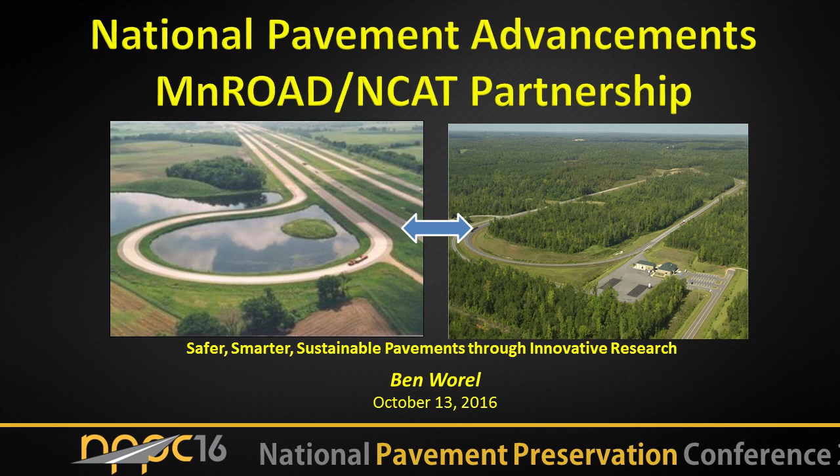Thank you very much for that nice introduction. And I appreciate being able to be here to speak to you about our partnership and the excitement we have related to it with our sponsors. Again, this partnership is something that Buzz and I have been thinking about for a long time. We always used to say, wouldn't it be nice? And thank all the sponsors and all the people involved to make this partnership possible. So we really appreciate here at the Minnesota DOT this partnership.

I'll talk a little bit about some of the parts about MnROAD, and I'll talk about the partnership. And it's important to know about MnROAD that we have a dedicated staff to be doing this work. MnROAD is owned and operated by the Minnesota DOT. We've been going now for 22 years doing different research. We've gone through a number of different phases of our research, and we've had a lot of success.

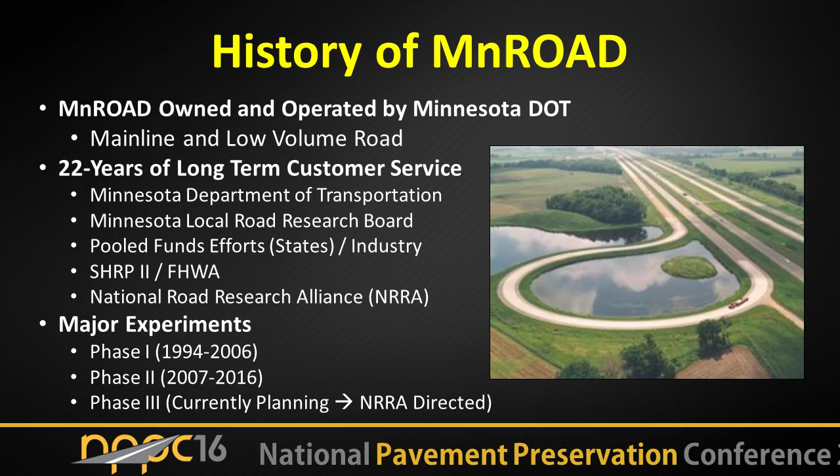We've worked with our Local Road Research Board, which is cities and counties of Minnesota that have helped sponsor our test track along with the Minnesota DOT. We worked with the industry, worked with Federal Highway, SHRP 2. And now we're working with the National Road Research Alliance, which actually brings in partnerships and things like that we're looking for to work with industry. We're rebuilding our test track with the National Road Research Alliance input, and really looking forward to our third phase of research.

Something to say about our operations. Again, we're very lucky in the state of Minnesota with our top staff. It really appreciates having researchers that can do research, not just manage research. So we have a lot of staff that are able to do this, and that gives us the consistency that you need to have a successful organization when it comes to research. So, when one person leaves, we have more people to fill in behind them. And MnROAD's really good because it allows for that type of facility where everyone can work, and you have people to back each other up.

But we do a lot of the research development. We do the construction, the performance monitoring. We have lots of sensors in our roadway, similar to what NCAT has. We have a database where we keep all the information, and actually most of that information now is online, where you can just click and get the information right from the website. But again, we provide traffic loadings, and one thing that we've developed just in the last year is the Pathways van right there. That's something that we've added.

We're trying to do our monitoring in more of an economic fashion. With this type of system, we have 3 Pathways vans in the state of Minnesota, 2 for production and 1 for research. And that research van is going to be one of the vans that will be collecting the data on our US 169 and our CSAH 8. But it gives us the opportunity to kind of branch outside of MnROAD and do different things like this pavement preservation, where I need a longer stretch of roadway to do it.

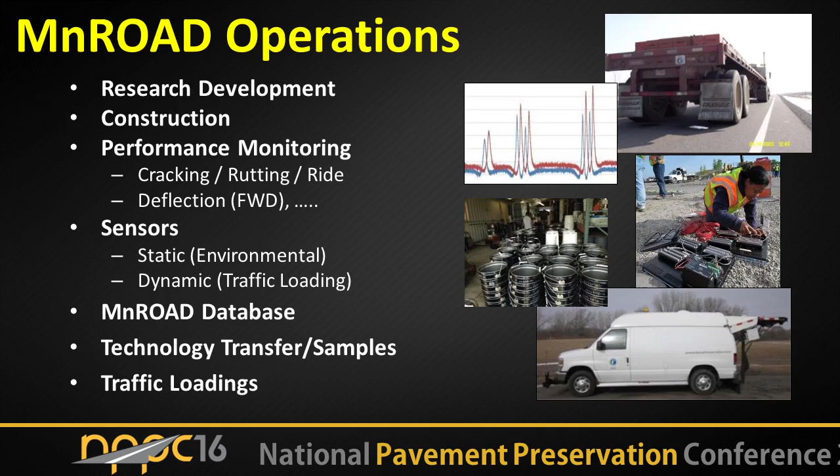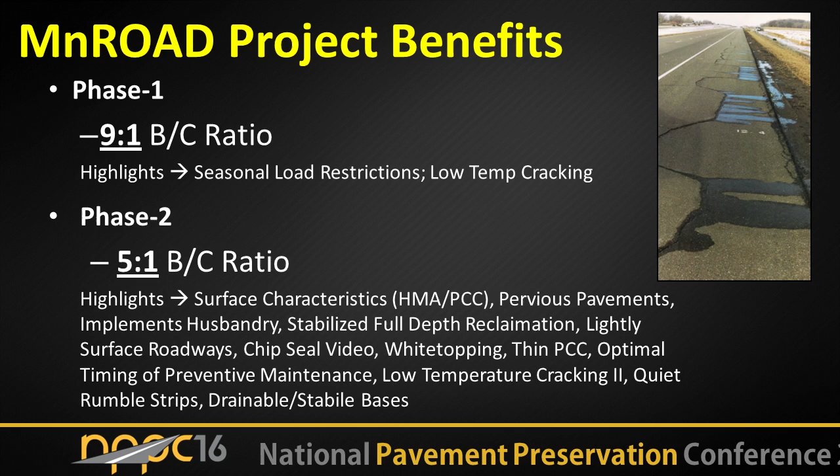I just wanted to show this, we've really done well in our research in Minnesota, and this is just showing the benefit cost ratios for Minnesota DOT and the Local Road Research Board. We're seeing in our first phase, 10 years, we were 9-to-1, and the last 10 years, we were about 5-to-1. I think we got a little more picky in how we established that. But we have shown a benefit for the state, and that's why the state continues to help sponsor our efforts there. But again, we're looking to be more of a national facility through the National Road Research Alliance in the future. A couple of things, we have done a lot of pavement preservation efforts at MnROAD.

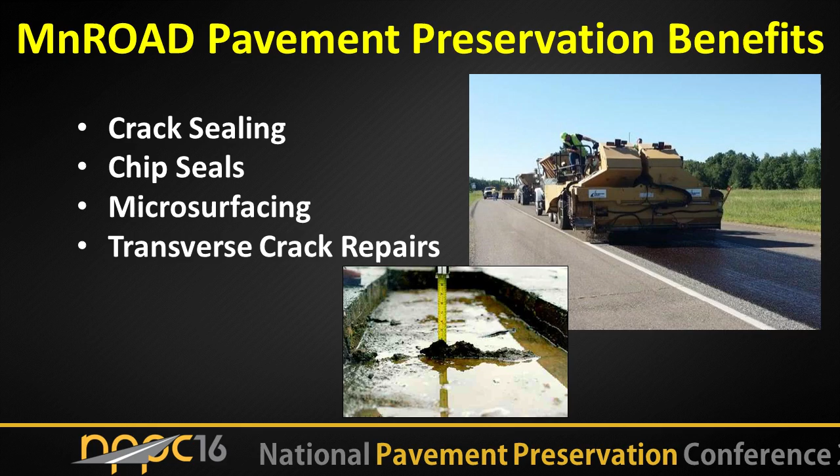I wanted to point these out real quickly. We've done a number of crack sealing, a number of reports related to that, the chip seals. Our first phase of research, we did microsurfacing on all the sections where we did combinations of 1-pass, 2-pass, filling in the transverse cracks, not filling them in. We have lots of good information on, even before the partnership developed, how to deal with our transverse cracks.

You can see what happens in Minnesota is the base is quite wet. We have non-drainable bases. You get these transverse cracks, and you get that deterioration, and you get the cupping of those transverse cracks. And I'll talk a little bit about that when we get to CSAH 8.

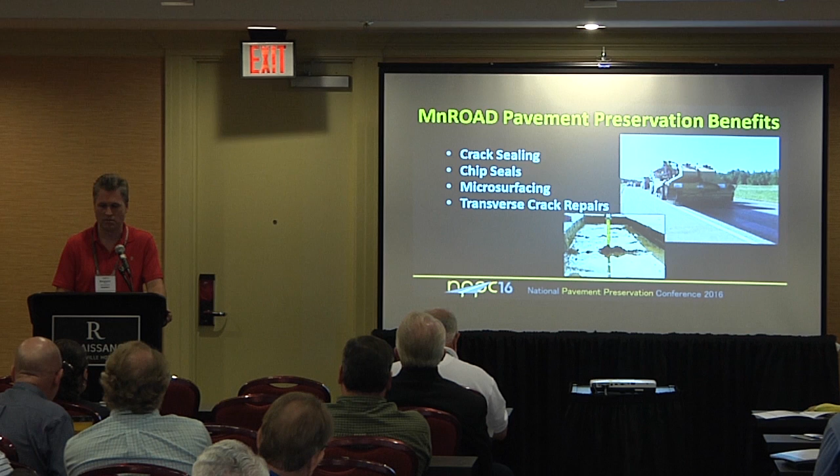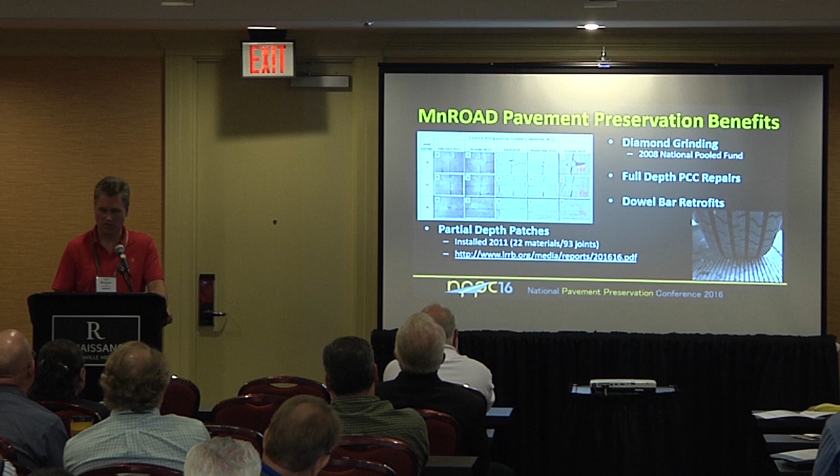We've done stuff in concrete too. This is something that we're quite proud of. We've done a number of different things with diamond grinding efforts, a number of different things with partial depth patches. We did lots of different partial depth patches on test sections in the last few years and have a pretty good report on 22 different manufacturers, different products that have been put out there. We've done stuff with dowel bar retrofits. So we're doing both asphalt and concrete at MnROAD.

And that kind of brings me to the initiatives, and the reason I'm here to talk to you is about the national research initiatives related to our partnership with NCAT. We're working right now on 2 different studies with NCAT, and one of them has to do with the National Pavement Preservation Study, but the other one's development of a national cracking test for HMA pavements. And again, this is under a pooled fund study that's NCAT. MnDOT is a subcontractor to NCAT in this phase of the research.

We have a lot of partners. One thing that's been nice about this partnership is before, we and NCAT both were kind of regional. We didn't go south, they didn't go north. But when we started looking at the research we wanted to do, it was really advantageous to have this partnership so we could bring in partners from both areas and have perspectives of the north and the south and the different climates that we have.

The National Cracking Performance Test, 2 slides on this, but this is where we've done a lot of work in the last few years through 2 pooled fund studies looking at thermal cracking, how to predict thermal cracking from the asphalt mix before you place that mix. We feel very strongly about this. NCAT is looking at top-down cracking, whereas Minnesota is looking at thermal cracking. But the idea here is that we'll be having a number of mixes and looking at whether we can predict that cracking and see what the performance is.

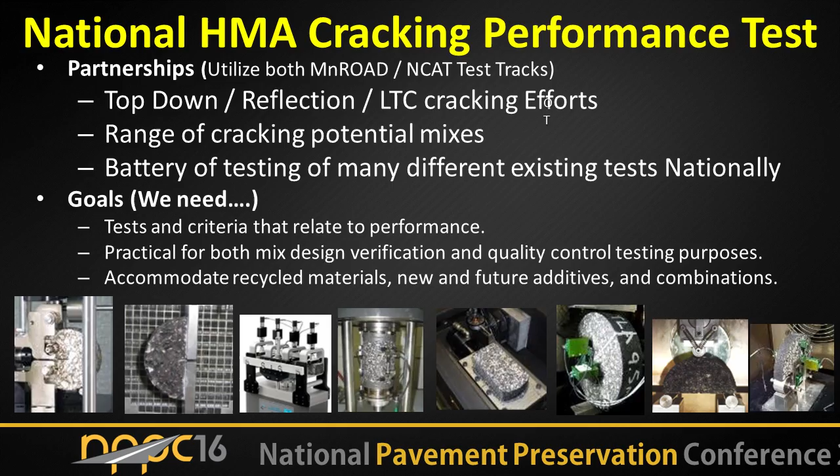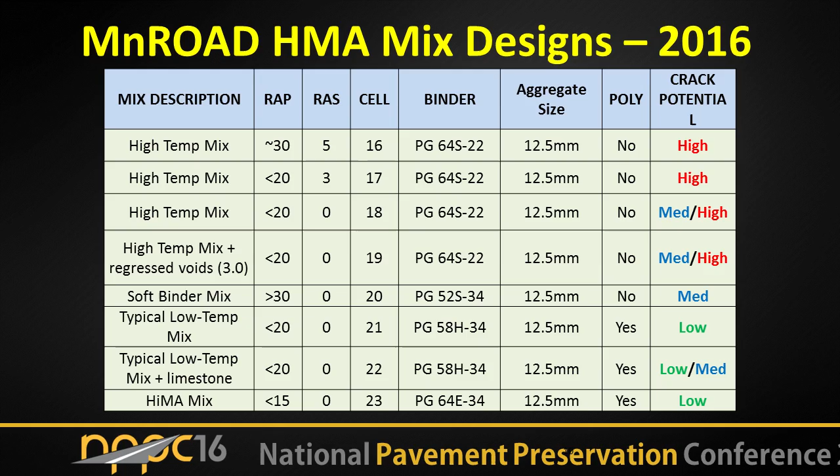But again, we built these 8 test sections. We just finished up this summer. Again, we're trying to figure out through the testing, and NCAT's doing a lot of the testing. We're doing some of the testing, and a number of other universities are doing testing on these mixes to look at that potential of cracking. And now we only have to wait for the inevitable, a nice cold winter, to see what happens.

Related to the National Pavement Preservation Study with NCAT, again, the idea here is that we needed a long stretch of roadway. MnROAD itself doesn't really lend itself to that because we have 500-foot test sections. And those test sections, just like NCAT, there's not a lot of space or a lot of real estate to use. So that's why we brought it out to these different test sections that are nearby on US 169 and CSAH 8, just like they did in Lee Road and US 280. The idea is to bring it out there so you have consistent layers that you can build upon and then look at the performance of those layers.

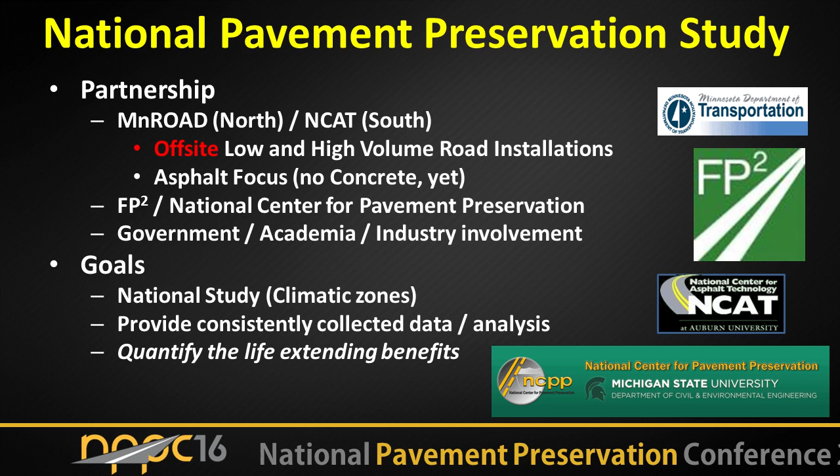But again, we've really appreciated having the partners that NCAT was working with through this, FP Squared, along with the National Center for Pavement Preservation here that's sponsoring this conference. Really appreciate their input, but that allows us to have climatic zones for both north and south. And now with this partnership, it kind of forces NCAT and MnROAD to do things that we've always wanted to do also, is do data collection in similar ways, do different things, and look at the life extending benefits of these treatments.

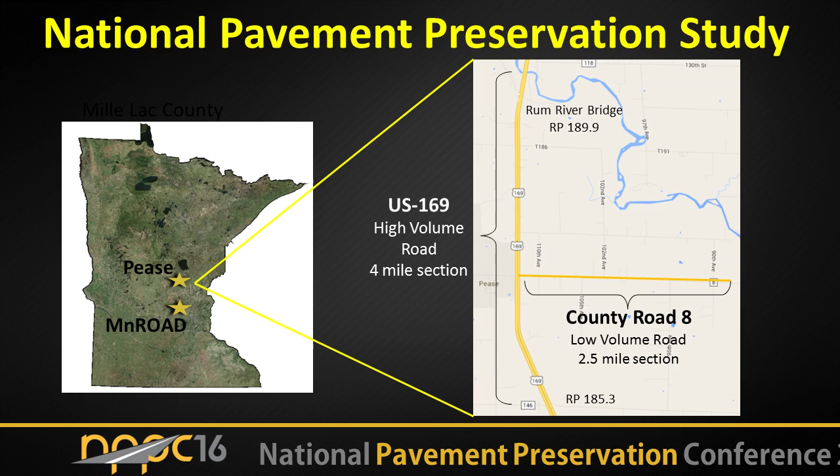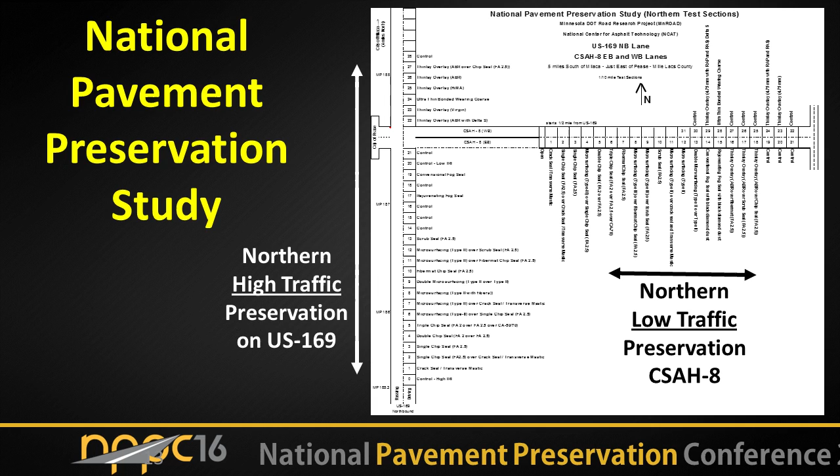Again, when you look at Minnesota, just north of Minneapolis-St. Paul is MnROAD, about 30 minutes out. If you go an hour north of there, you hit a town called Pease. And in Pease, that's where the different test sections are. We have 169, we have 4 miles that we can work with there. And then on County Road 8 or CSAH 8, we have about 2.5 miles of section. And you can't see this, but it just shows you that there's a heck of a lot of sections here. I'm going to jump through these and look at the different ones that we have and go over them a little bit. And again, these things were just built this year, this summer.

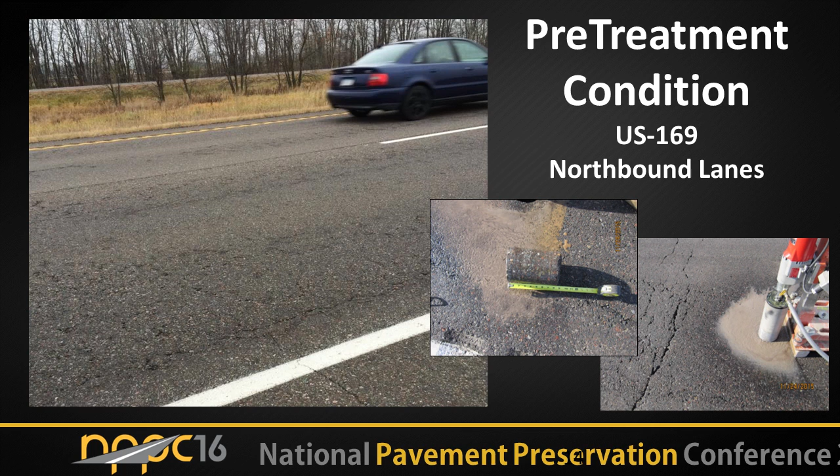The pre-treatment condition on 169, this section is maybe a little farther gone than you would really want for pavement preservation, but the idea is the sponsors wanted this type of roadway. They wanted to test the different treatments and really see how well they work. This road's probably about 10 years old. It has thermal cracks, has some fatigue cracking, and it is kind of a dry mix.

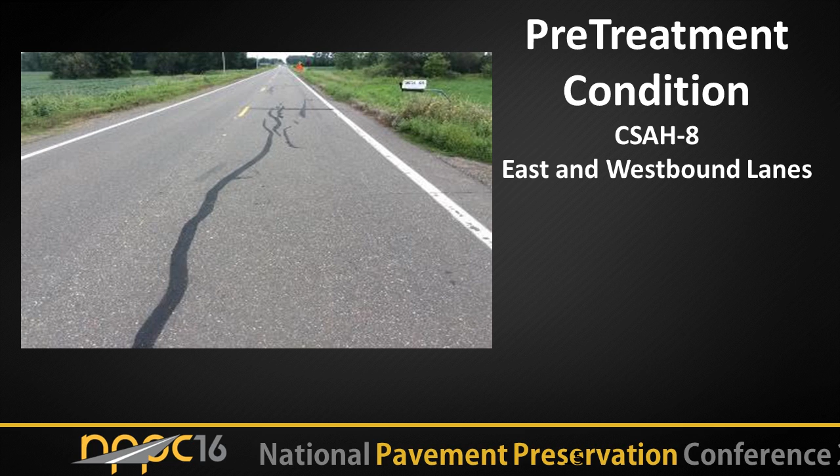When you look at CSAH 8, the low volume road or county road, this has classic thermal cracks. We have probably one every 40 feet. Those cracks are cupped, which really hurts the ride. So we have those cupped cracks. We have some fatigue cracking in the wheel path, and very little longitudinal cracking in the center line right now.

So the things that we did with Buzz's help when he was up there, and I keep wondering when he's going to start talking Minnesotan, but he hasn't quite lost that accent, but bless his heart.

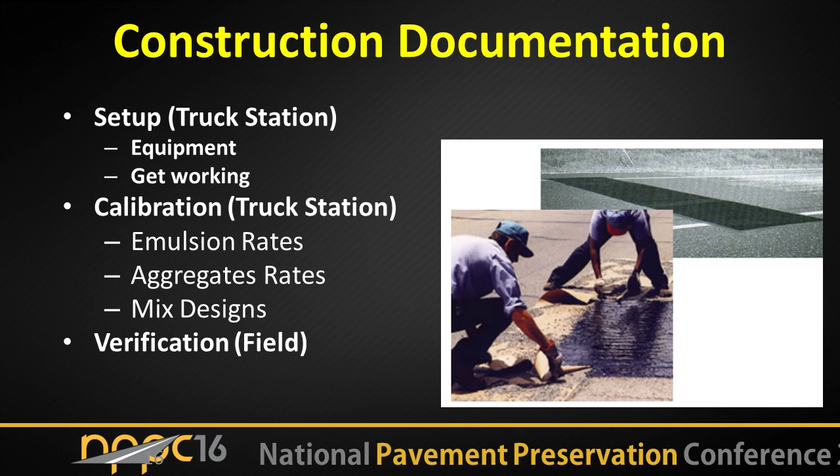But again, we did a really nice job of tracking what happened when we did this. When we had all these different companies coming up and helping us, we did a lot of different things with the setup to make sure that all the equipment was working before we went out on the test sections. We looked at calibration of these different pieces of equipment and checking the emulsion rates, aggregate rates, and mix designs, and then verification in the field. That's very important, so we have a lot of control on what's going on out there and understand each of these treatments for the future when we start looking at the analysis.

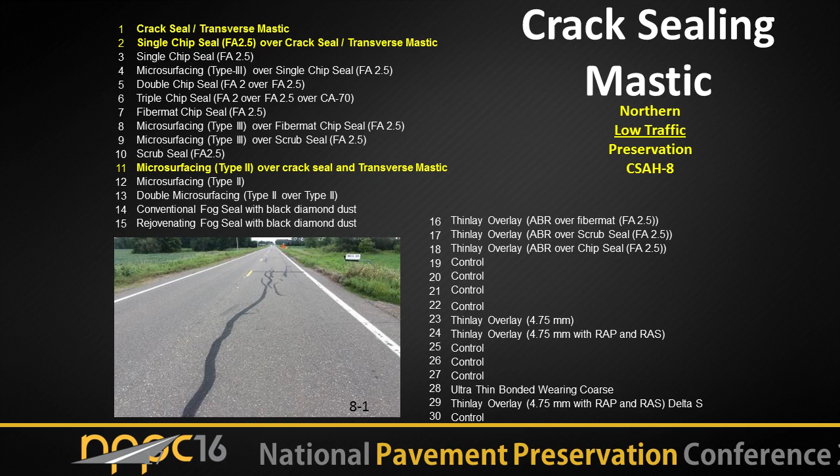Here, again, you can't read it, but the idea here is that of the test sections, we did similar things on CSAH 8 as we did on 169. So the low and high volume have the same treatments on them for the most part. But when you look at crack sealing and mastic, we had 3 test sections related to that with combinations of different types of materials.

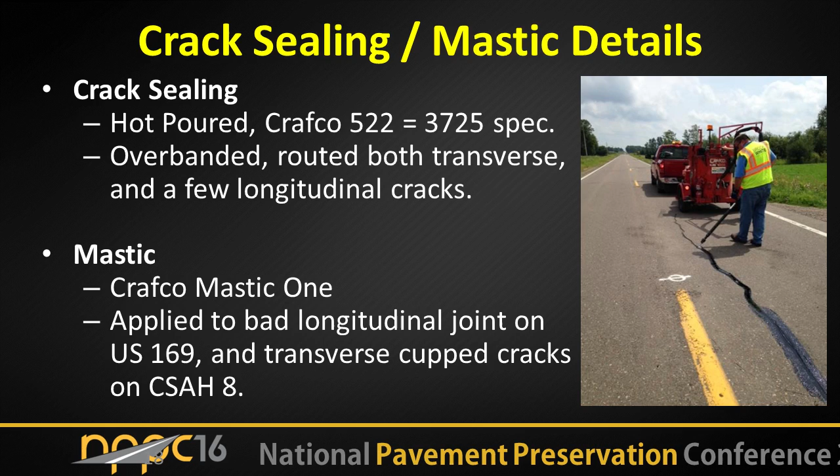The details that we did, hot poured, Crafco helped us out with that. We overbanded, we routed the transverse cracks and a few of the longitudinal cracks. And we did have that mastic that we also used for the cracking. And again, that was a mastic crack fill. And so we have these different sections that we built with crack sealing and mastics.

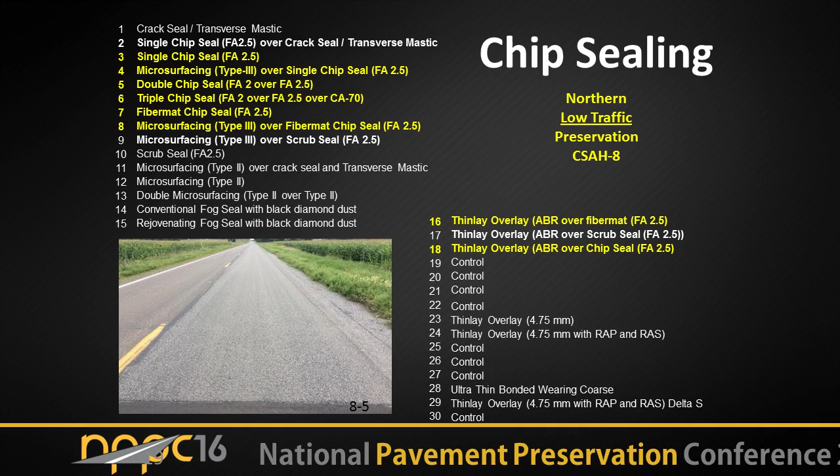When you look at chip sealing, again, it's hard to see here, but in yellow you can see the sections that deal with chip sealing. And with chip sealing, we did a single, a double, a triple, which our northern states said, why in the heck are we going to build a triple? But we did it anyways just to be consistent with what they did down at NCAT. So there's things that we did that we didn't necessarily think were going to work, but we did them just for the sake of research to look at those.

And when you look at the chip seals, here's some of the details on that. I don't need to go over them too much, but you can see, again, the single, double, triple, and different combinations we did on top of other types of treatments. So we typically used an FA2 rock, FA 2.5, and a CA 70 when we got to the triple chip seals.

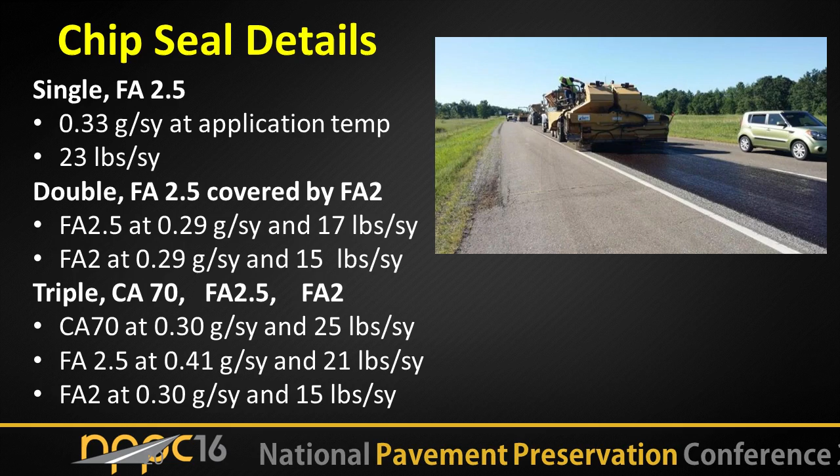Scrub seals, this is something that many of the northern states, at least in Minnesota, have never used. And it's something that NCAT's been talking about that's worked really well. We have 2 or 3 sections on our CSAH 8 with scrub seals.

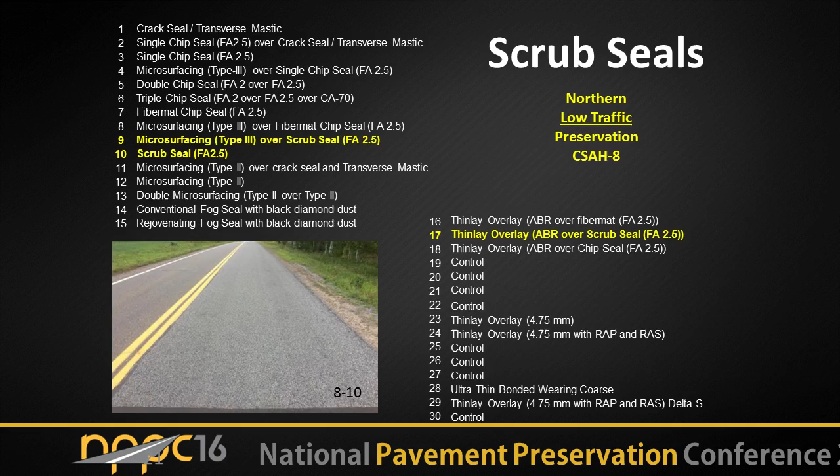And with that scrub seal, again, you saw a lot of these things yesterday through the demos, which worked out really well. It's that broom with the distributor that scrubs the emulsion into the cracks. It seems like that's going to be working very well for us. We've had scrub seals that we cover with microsurfacing, and we also had some thin lays that we used to cover up these scrub seals, and scrub seals by themselves also.

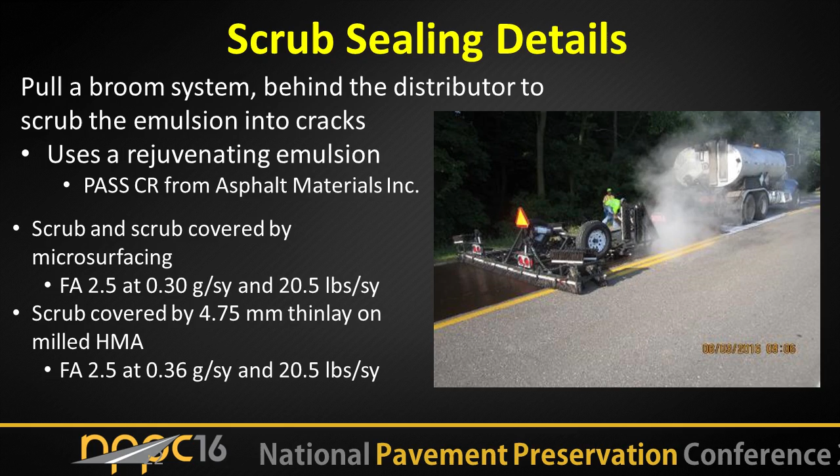Microsurfacing, Minnesota has been doing microsurfacing a number of years. We've really liked the benefits of the microsurfacing, but we did a number of different microsurfacings and different combinations using microsurfacings. We used type 2 on 169, we used type 3 on CSAH 8, different types of aggregate sizes. You can see the emulsion there. Again, this emulsion was typical in Minnesota. It didn't quite pass the ISSA mix specifications, but it's very close.

We did do a single, a double, and we did some micro over different types of treatments. We also did some of the micro like we do in Minnesota, typically in the passing lane, which is a little different than the national advice, but it's worked very well in Minnesota.

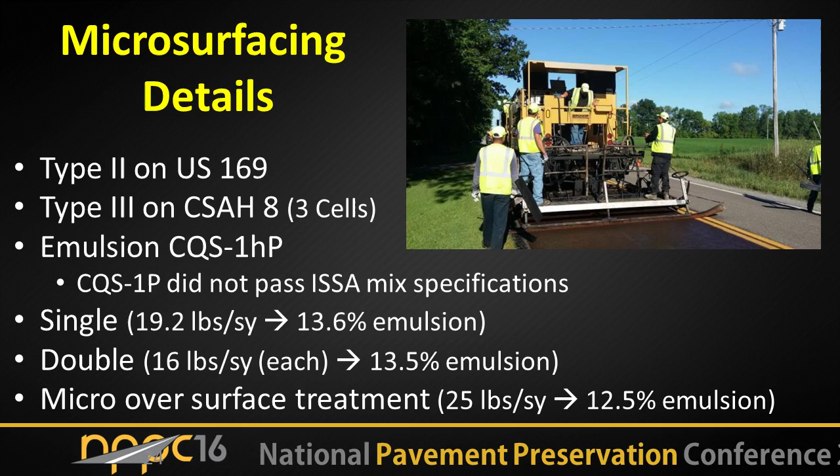One of the things that I just want to emphasize, again, Buzz talked about the QA/QC efforts, and having something like this is helpful for states to make sure that we're getting the right things. We wanted to emphasize this again, to have a simple test to verify that you have the right amount of water, the right amount of asphalt, and your aggregate percentages are correct. These types of tests are needed if we're going to advance this type of technology and use it more frequently.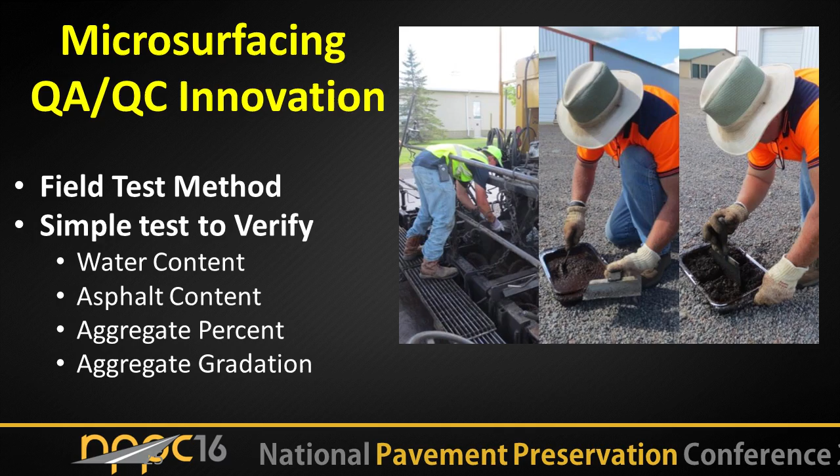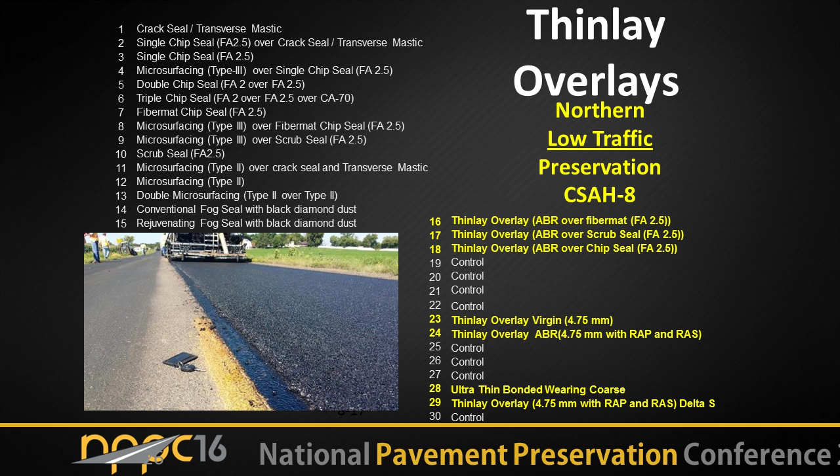Thin lays, again, we did a number of thin lays. Minnesota is just getting into this type of technology, but it's great to try the different combinations of thin lays and different types of treatments. Again, we did this on our high volume and low volume. This involved doing a mill and then a fill related to those. You can see the different types that we did, from a virgin to an asphalt binder replacement. We used Delta S rejuvenator for one of the asphalt binder replacements.

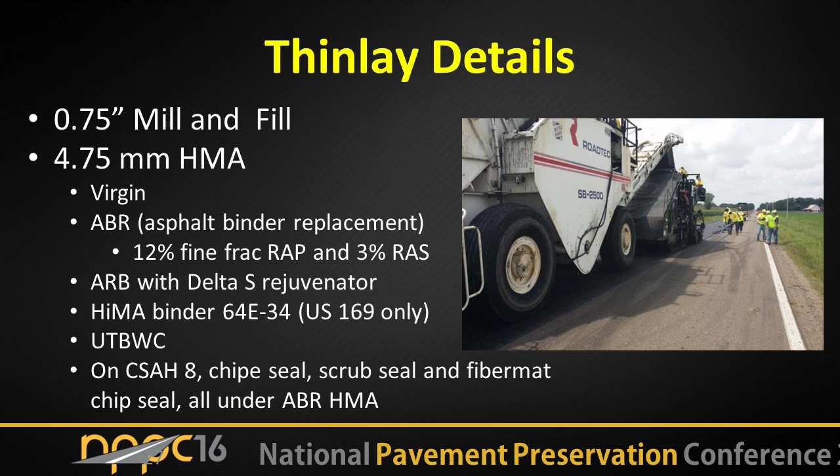We did the HIMA, the ultra thin bonded wearing course, and there are lots of different things that we typically don't use as a state, but it's going to be really great to watch and see how these perform, and that might influence us into the future, and other states and other sponsors that we have.

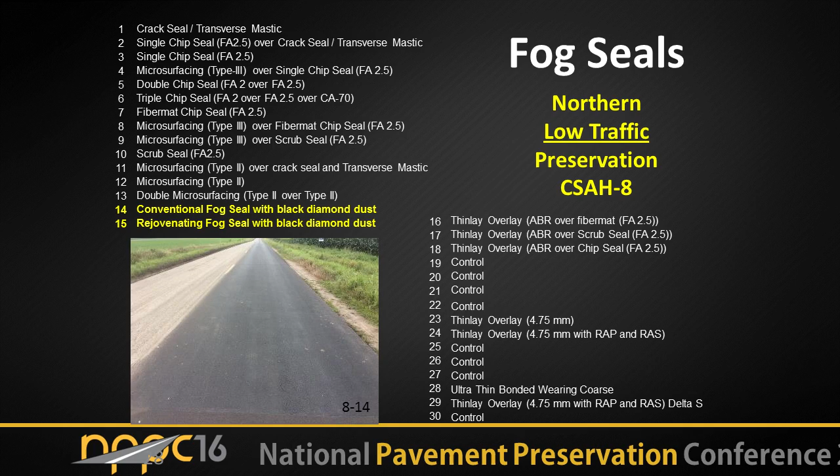Again, we used some fog seals too. We used a conventional fog seal and a rejuvenating fog seal. So I guess what I'm saying is we did a heck of a lot of things out here that you wouldn't typically do on a normal roadway, and it's going to be really helpful. Again, the 2 different fog seals and what we're doing with those fog seals.

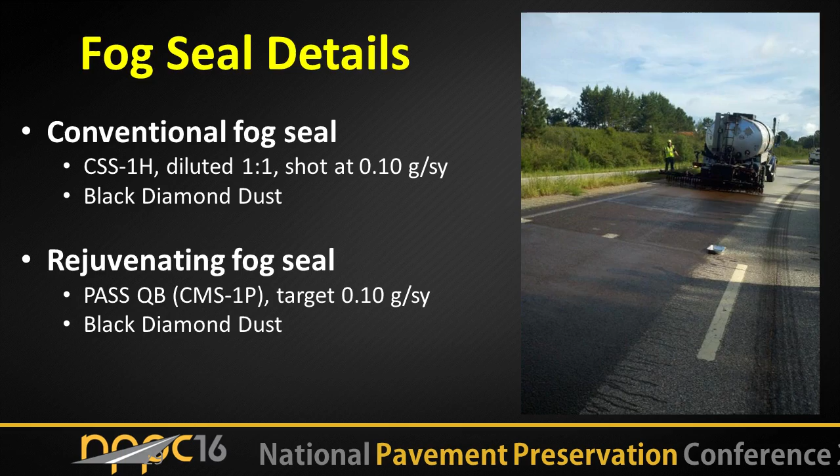And we also did an ultra-thin bonded wearing course. So again, I'm just kind of running through these different sections. I don't have any performance to show on them yet. But again, I just wanted to show that we're building stuff similar to what they did down south, and we're looking forward to the future related to that.

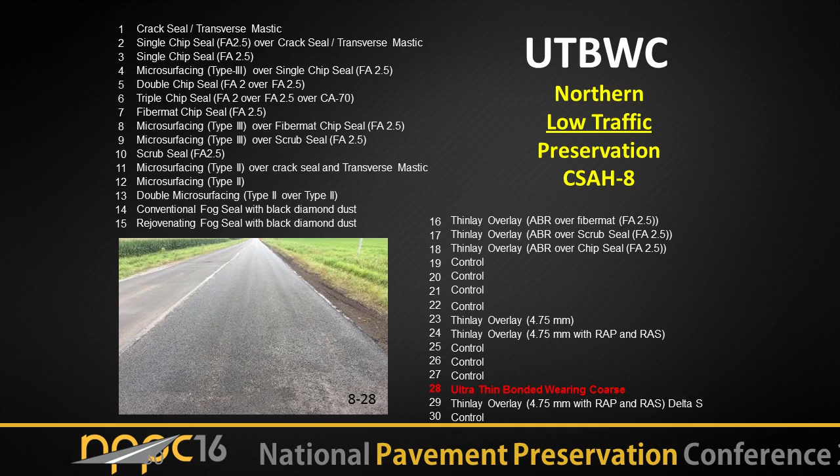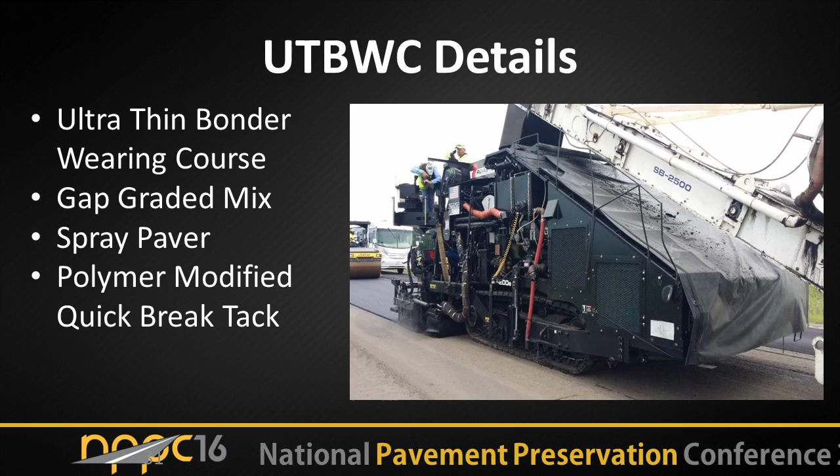Again, the details on the ultra-thin bonded wearing course. We used a bonded wearing course, gap-graded mix. Used a spray paver. It's something that we typically don't do because we only have one spray paver in our state. But it was great to have that up there at that facility for people to see that. And we used a polymer modified quick break tack on that also, which is something new for us.

And we have a number of control sections, like Buzz said. Again, we want to compare these. We're going to split them off into different subsections and look at the performance to get those life extending benefit curves for each of these types of treatments and combinations.

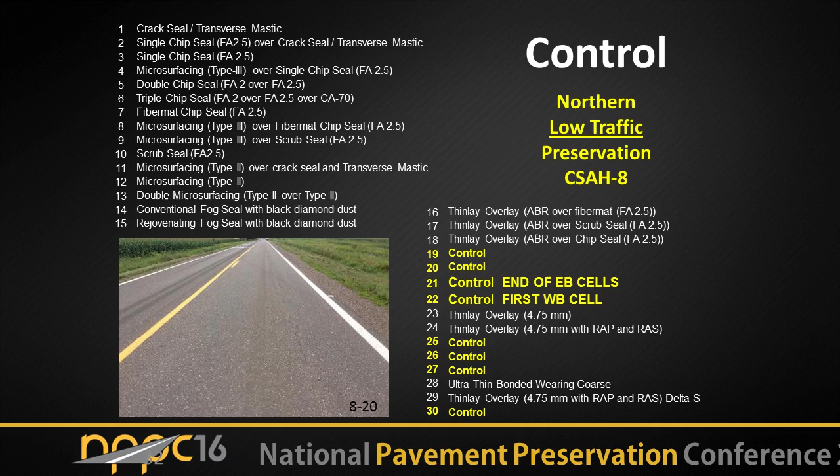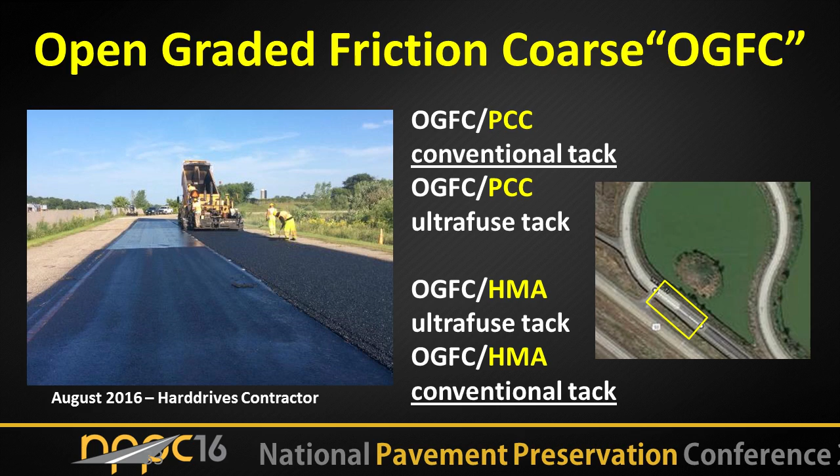One thing that was kind of interesting related to the open graded friction course: Buzz tried his hardest to get us in Minnesota to build this on our 169, to get us to build this on our CSAH 8, and it's something that Minnesota just doesn't do. We don't build these because we've had issues in the past. We'll be having snow plows, which is going to be a little different than they have in Alabama unless they have a real tough winter.

But this open graded friction course, and what's nice about MnROAD is we were able to take a spot that had both concrete and asphalt, and try this type of mix because we're worried about the environmental factors related to it. So our low volume road, our semi driver is the only one driving on it. It's a closed loop, no one in the public is driving on it. So we felt this was a great place to look at this and see how it performs, and maybe that will change our minds on how we do it.

But again, we did stuff with ultrafuse tack along with a conventional tack. We did it on concrete and asphalt, and it's about a 200-foot stretch that we'll be able to monitor this winter and see how it performs. If that performs well, then we can bring that out maybe to other roadways in the state. But again, the northern sponsors were very reluctant to do this. And again, the low volume road should help us out.

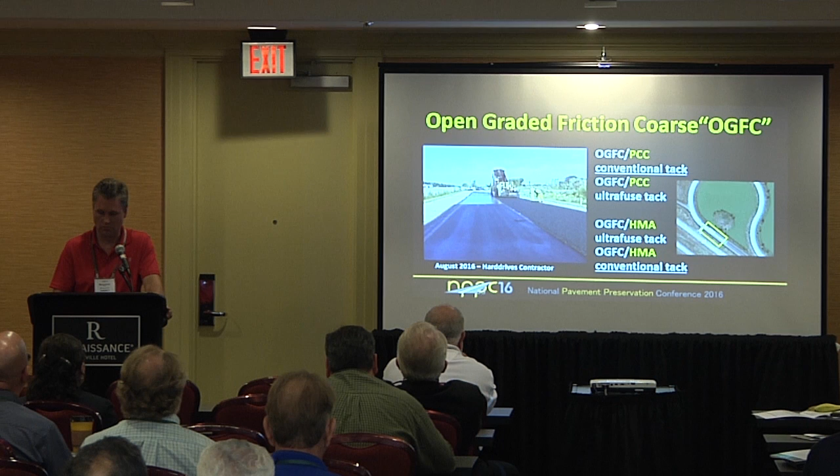And I've got to thank all the sponsors, all the different people that helped us out here. We wouldn't be able to do this without these different groups. Buzz was instrumental in bringing East Alabama Paving up, Vance Brothers. They did a great job coming up there. That's going to give us some consistency for the future to look at these test sections, not only in a southern environment, but also a northern environment.

And I also wanted to state that Buzz showed some of his graphs, and some of the graphs really show the life extending benefits of doing this over that. But again, this is going to take some time and commitment. Right now we're in 2016. Our pooled fund is over. Once that pooled fund is over, we're going to be talking about different ways to do long-term funding on these different test sections. And again, it's going to take a few more years to do that.

We'll be talking with the sponsors later on this month. But that'll be a reduced rate, I would imagine, because we have the test sections constructed. It'll just be monitoring and analysis type of activities going on for the future. But again, we want to take each of these treatments compared to the pre-existing condition and really see what happens.